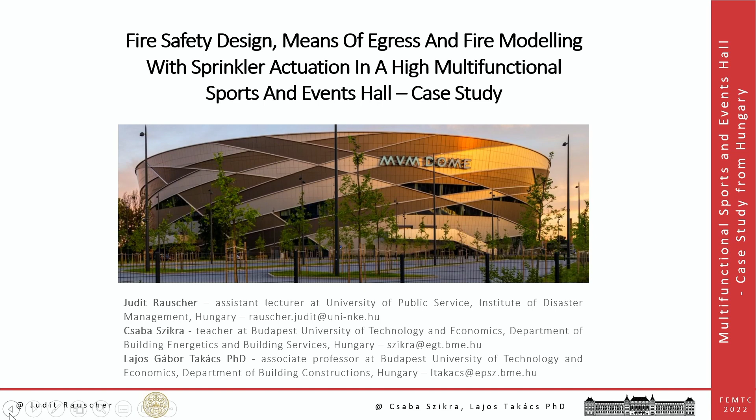Good morning, everyone. First, let me introduce ourselves. Judit Rauscher, she was responsible at this case study or design work for evacuation simulations. My colleague Csaba Szikra, who was responsible for fire modeling, and I'm Lajos Takács. I was involved in both traditional fire safety design and fire simulations.

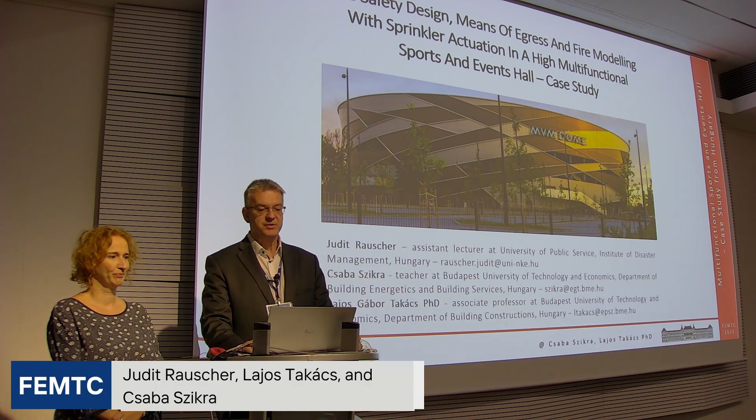So, we'll introduce this arena or sport event hall called MVM Dome, which was finished in 2021 in Budapest for the 2021-22 Handball European Championship. This is a multifunctional building, and the design was started in 2019.

As I mentioned before, the building was finished by December 2021, which was a pretty short time for design and build construction. The building has 5 floors, and the highest floor level is 23 meters above the ground. The most important data: 20,000 people is the capacity of the spectators area, while at certain events even 24,000 guests can be in the building.

This is one of the largest indoor areas now in Europe. The total floor area is more than 50,000 square meters. It is divided into 17 fire compartments. There is a fire detection system, sprinkler system, and public address system. All the staircases are pressurized, and there is a smoke and heat ventilation system in both the arena and the concourse areas.

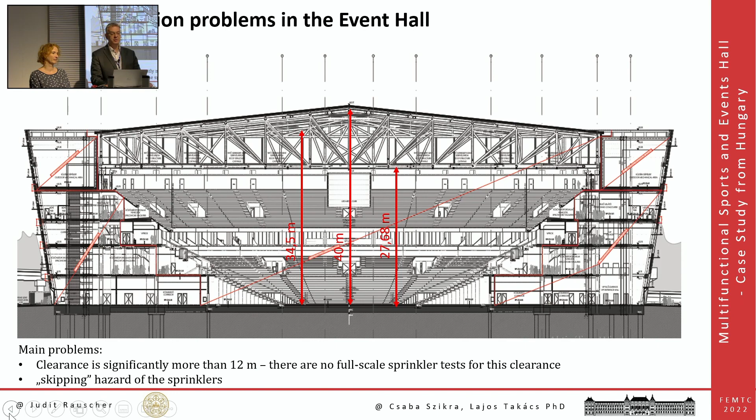So our first problem was what to do with the extreme dimensions of the building, mainly the headroom or clearance, which at the highest point is exactly 40 meters, and such a large building must be protected with a sprinkler system in Hungary.

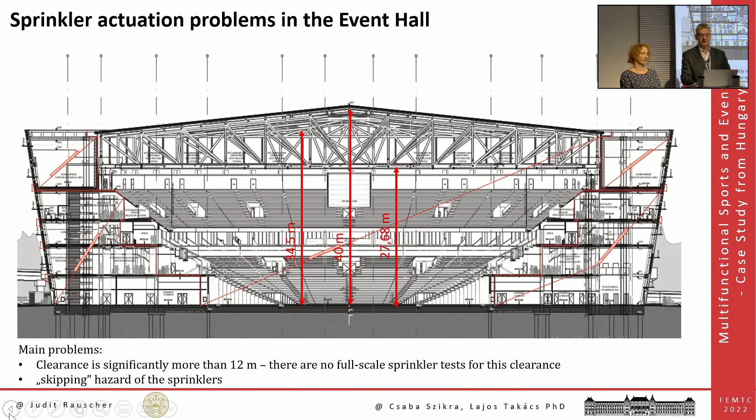Obviously, activation of the sprinkler and the so-called skipping hazard is a challenge. Interestingly, the European sprinkler standard says only one sentence about buildings exceeding 12 meters: authorities shall be consulted at these buildings. Okay, we have consulted with the authorities, they required sprinkler. Then we can finish this presentation, of course, but obviously we checked what kind of sprinklers can be used.

We have a guideline in Hungary about sprinkler systems or fixed firefighting systems, and it recommends quick response type sprinklers at such high clearances, referring to full-scale fire tests.

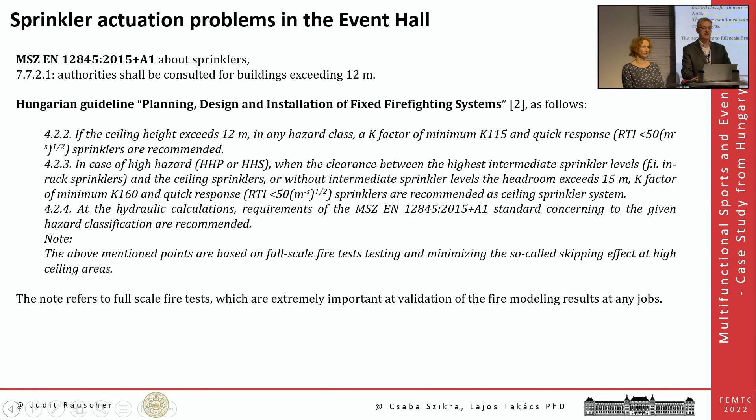You can see here... oh I'm sorry, wrong direction. Finally, our sprinkler designer colleague offered a special quick response extra large orifice sprinkler, according to a publication about large headroom sprinkler tests, full-scale fire tests, with a K factor of 160, an activation temperature of 68 degrees, and an RTI factor as low as 28.

So our goal was to test the large area, how the sprinklers are activated, what kind of fires can happen over there, what are the activation sequences, and whether there are skipping problems or not.

Fire modeling is usually provided with predetermined fire scenarios and fire sources using simple cubes, but we felt in this situation more complex or complicated objects are required for a more realistic fire modeling. Just 2 examples.

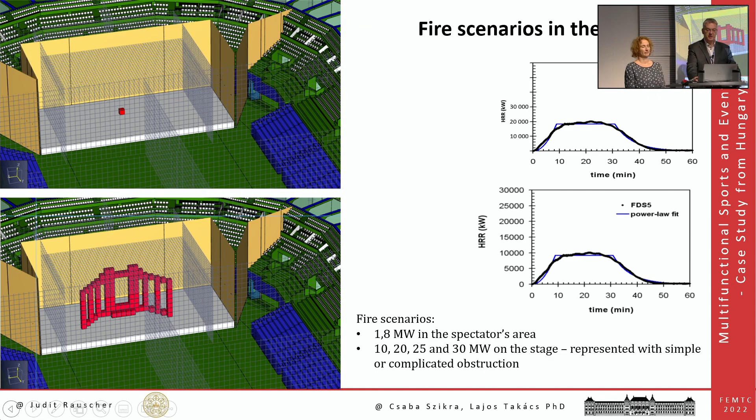So here are our results. The activation times were pretty long, obviously, because of the high clearance. But over a 10 megawatt fire source, at least 1, 2, or even more sprinklers were activated. Obviously, increasing the fire source heat release rate, more and more sprinklers were activated.

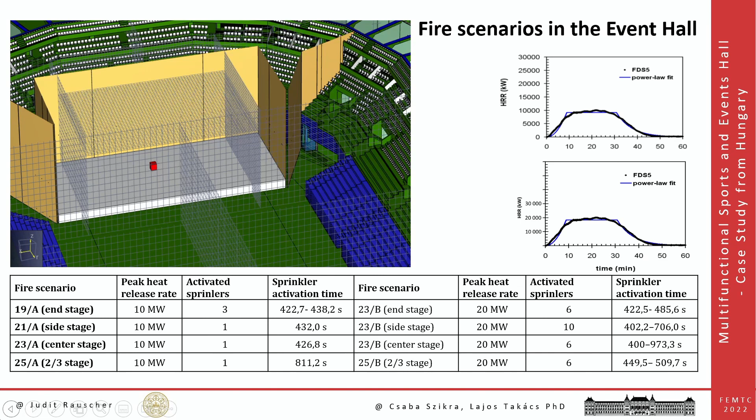And obviously, it was even more interesting with the spreading type of fire, where the activation times were a bit longer. Interestingly, here we had an important conclusion: the smoke and heat ventilation and fresh air supply must be delayed.

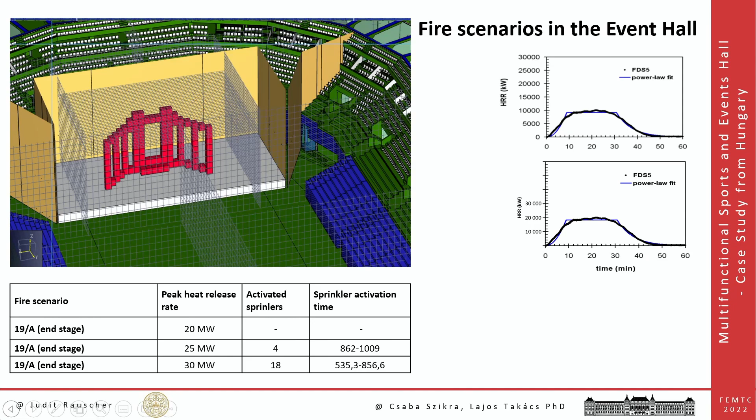The delay is till the last sprinkler activation, in order not to have skipping or to minimize the skipping effect, because otherwise, if the smoke and heat ventilation is activated automatically without delay, the plume was not vertical, and at such a high clearance, the sprinklers were activated in another position. So obviously we still had at the end some sprinkler skipping problem.

Here there is a layout showing all the activated sprinklers at one of our fire scenarios, showing that of course several sprinklers have been activated.

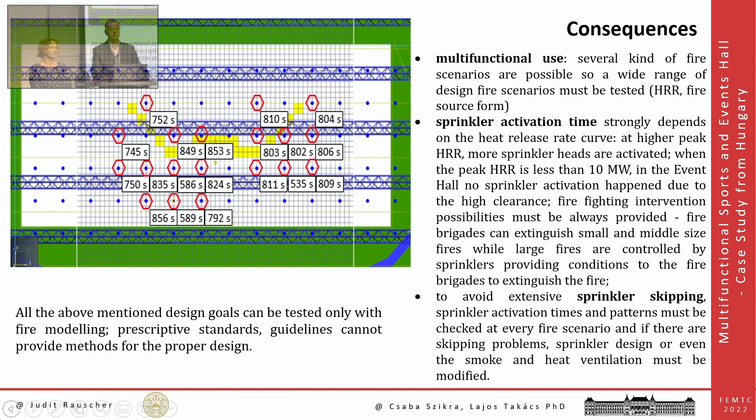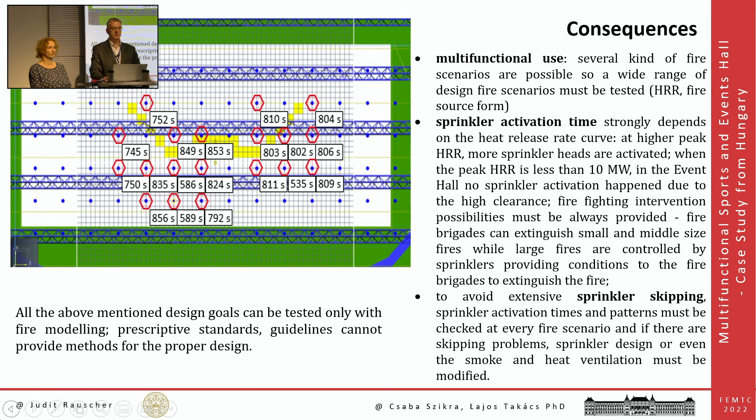So the fire is more or less covered with activated sprinklers, but anyway, a complex approach is needed to provide proper results, because not only the sprinkler activation is important, but if we have a long delay at the activation of smoke and heat ventilation, it means a safety problem for the evacuation time, which will be shown by Judit.

Anyway, we have two tasks. First, to provide proper conditions for evacuation. Second, to provide proper conditions for firefighting intervention.

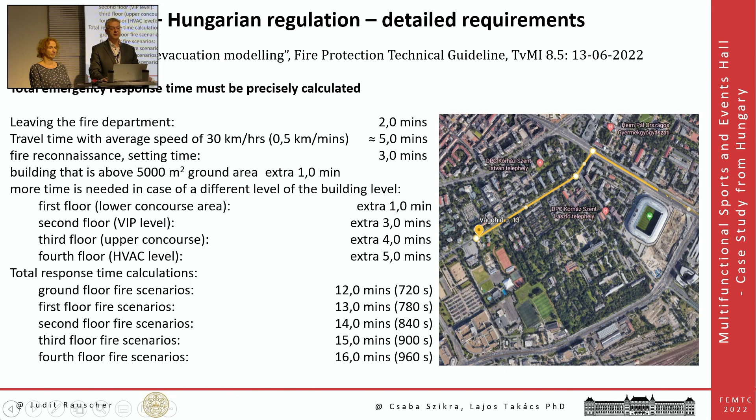And for the second task, we have to calculate precisely the total emergency response time of the first fire brigade, according to our fire modeling guideline, which is shown here.

According to the Hungarian guideline, the visibility can be less than 5 meters only within a 25-meter radius circle around the fire source, which was fulfilled by the controls and the building, even without this type of long delay, because of the enormous hall or room or area.

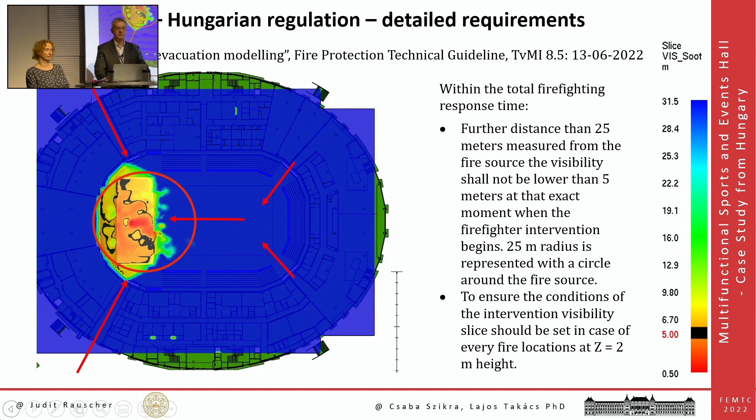So this was the story of the event hall.

And the other challenging task was to provide proper conditions for evacuation at the concourse areas. Here the ground floor is shown. Only one part of the ground floor was part of the concourse area, but here you can see the first concourse level where we provided not a simple smoke and heat ventilation, but a smoke control system.

We divided the concourse area into 6 or 8 zones, depending on the level, and there were multiple reversible smoke and heat ventilation and mechanical air supply points, and they were controlled according to the position where the fire broke out.

So in the affected virtual zone—because there were no real draft curtains or smoke barriers—at the affected fire zone or smoke zone or virtual compartment, the smoke and heat ventilation was activated, and in the neighboring zones, air supply was activated.

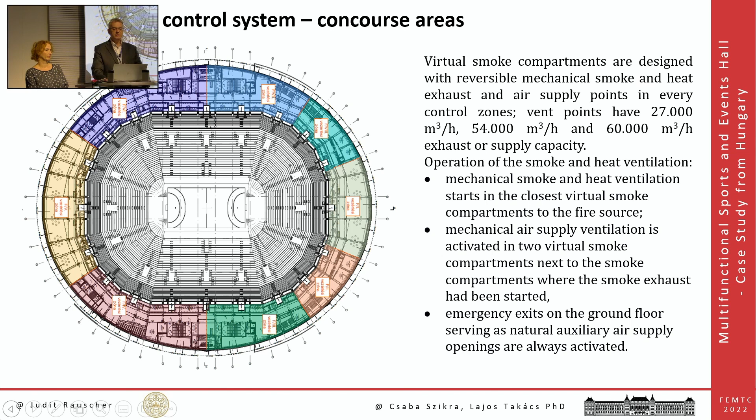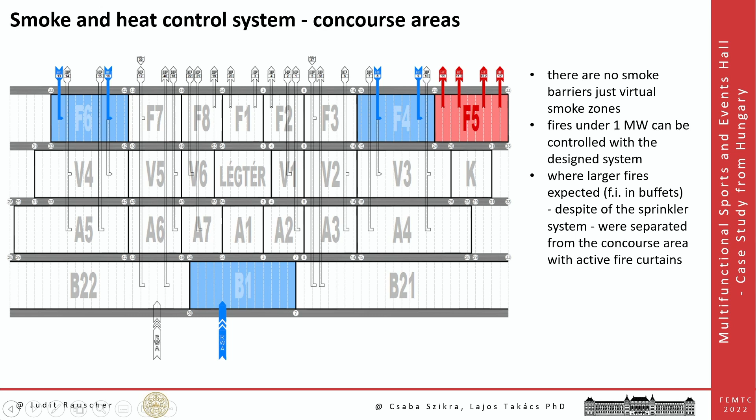You can see here we used different points, and just one of the control schemes showing the affected zone with red, and the heat and smoke ventilation and air supply zones, the neighboring zones, with blue color. So finally, we were able to provide proper conditions for the evacuation.

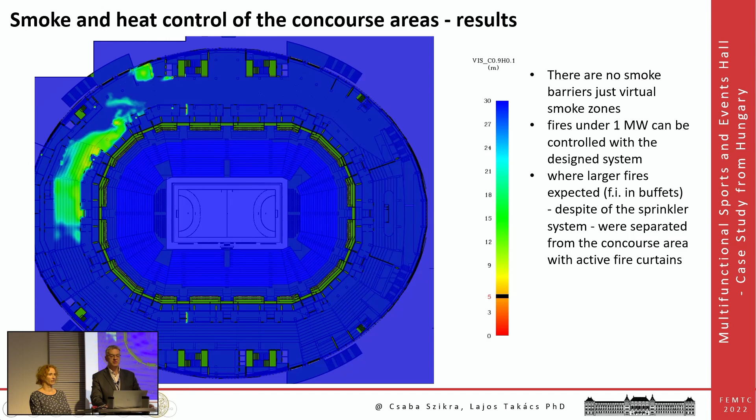You can see here one of our results showing that the smoke spread is quite limited, but a very important consequence was that it is working only with small or medium scale fires. So fires over 1 megawatt power output or heat release rate would be too much.

So there were two additional requirements. Only a small amount of combustible materials can be placed in the concourse area, and obviously there are large special places where the amount of combustible materials is more, like the buffet. Buffets were separated with automatic active-type fire curtains from the concourse area in case of fire, and with this type of solution the conditions were acceptable.

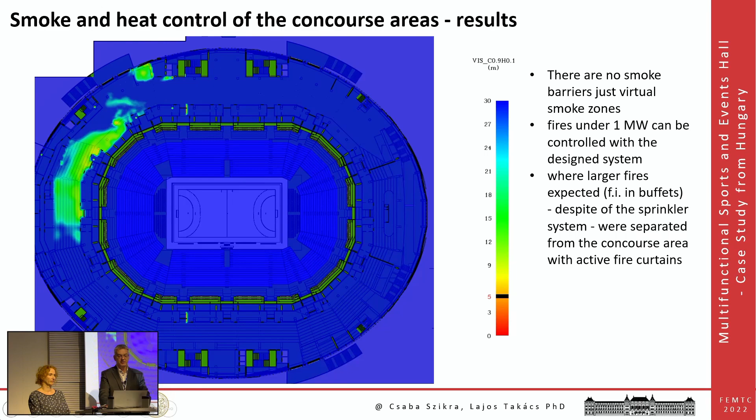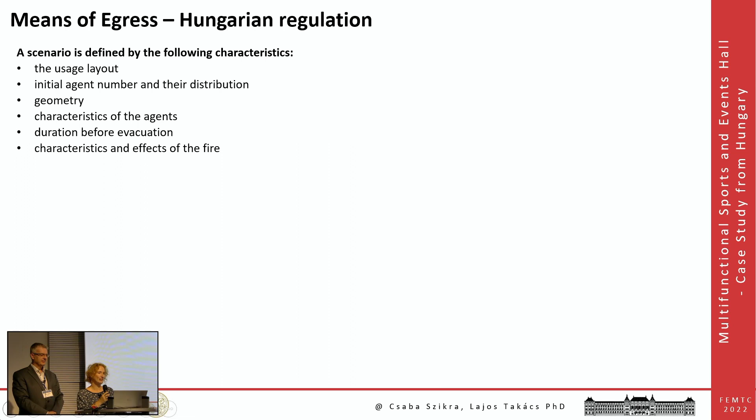It's okay. Hello, then let's speak a bit about evacuation. First of all, I would like to say some words about Hungarian regulation. As you know, a scenario is defined by the following characteristics, for example the layout, the agents, numbers and characteristics, and so on.

But Hungarian legislation says for a design process we only have to check the worst case scenario. But we believe that it is not enough for such a building, so we try to check more and more layouts and scenarios in this case.

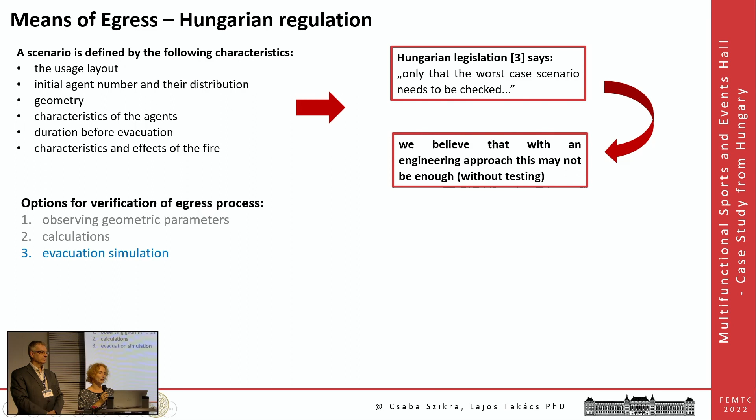Due to Hungarian legislation, there are 3 options to verify the egress process: by observing geometric parameters, by calculation, or by evacuation simulations. Due to the codes, for this special building there would be a 90 second period for the first part of the movement, to reach the fire-safe route, which due to the size of the building was not good for us. It's too small a time. And in the code we can use pre-movement time of 0, and for calculation, this speed.

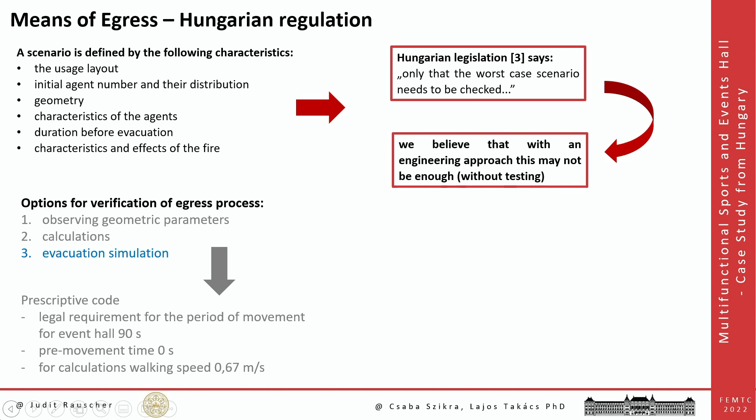We decided not to plan or design this building with the prescriptive code. Then we checked with evacuation simulations. So we determined the ASET time by FDS simulation and the RSET time by Pathfinder.

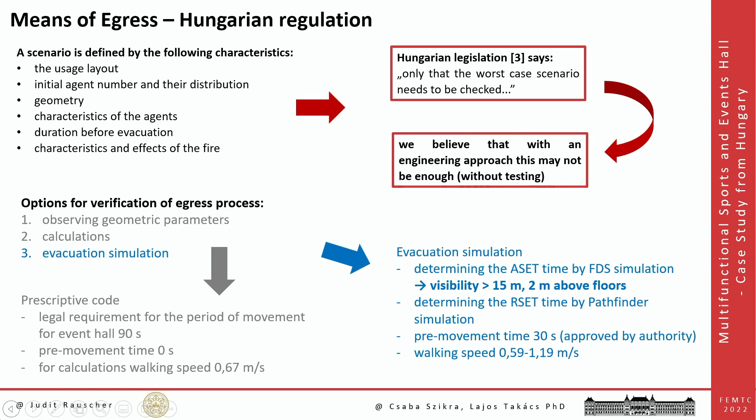Here are some pictures about the building. There are 4 external escape stairs from the first concourse level, which they can use. And from the upper side of the building, they can use 6 staircases. And there is one more route, the main stairs in the main lobby, which is an open area in the concourse areas.

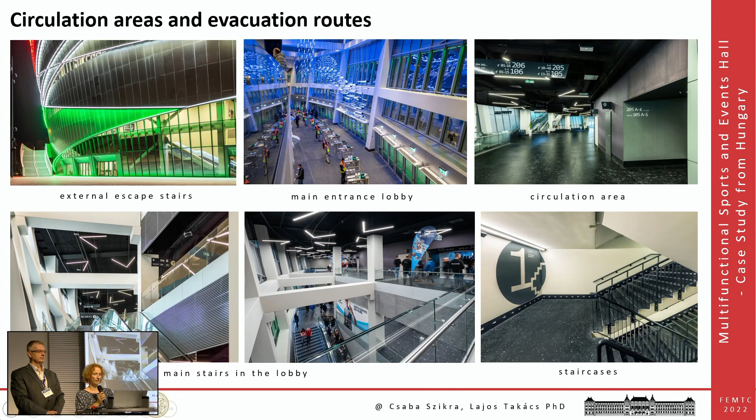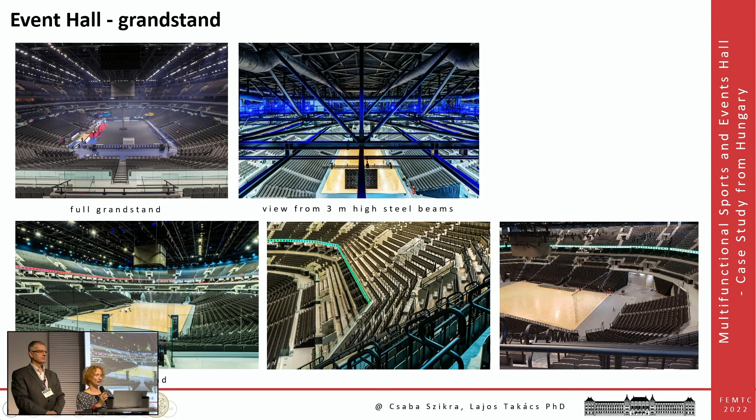The investors' aim was to build a multifunctional building for any kind of events. The architects made special solutions for that, dividing the grandstand into three areas. The lower grandstand is made usually with mobile stands that can be pushed in 3, 8, or 11 rows so they can change the arena. The VIP sectors and the upper grandstand are fixed with fixed seatings.

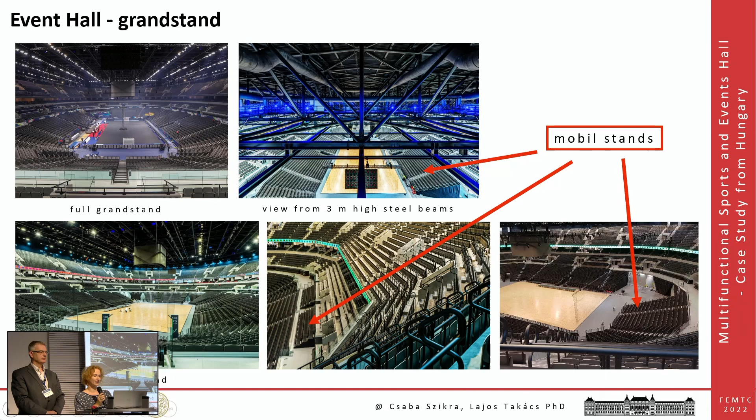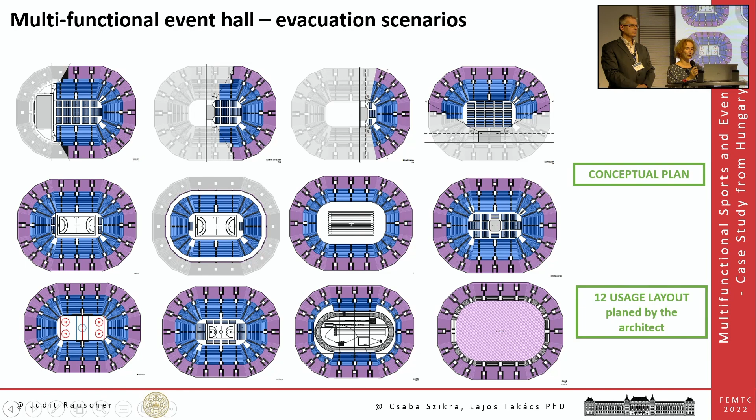At the conceptual plan, the architects drew up about 12 layouts. We decided to plan simultaneous and complete evacuation of the building because we found it would be the best solution, and the areas have to be planned for this number of spectators. At the permit plan, we had to choose only one layout because of our short time, which was the basic we used. This was the handball layout.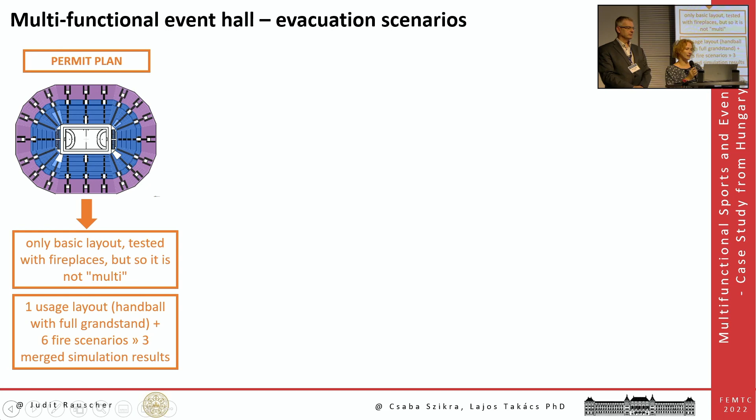And we made only for this the evacuation simulation, and we checked it with 6 fire scenarios. From these 6 scenarios, we merged the results into only 3.

At the construction plan, many other types of layouts came into the architects' mind. You can see the sports ranging from handball to ice hockey, curling, and even a swimming pool. That's a very wide range. For events, the stage can be placed in more places and have a side stage. There are other events like monster truck shows, so it's a really multifunctional plan.

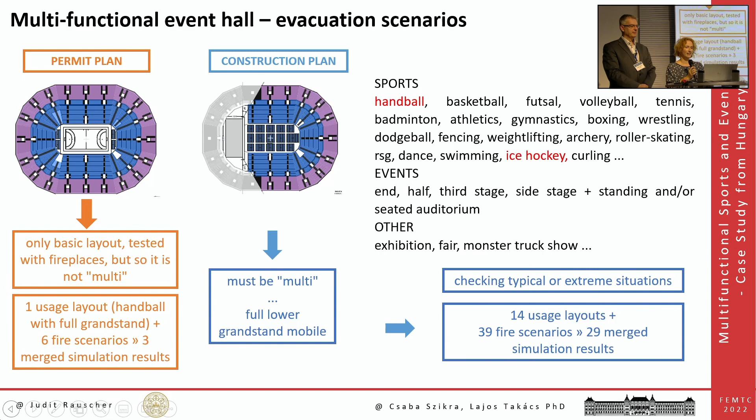We tried to make groups from all these layouts which have similar features for the egress process. So we created 14 layouts, and we checked them as typicals or extremes, with 39 fire scenarios.

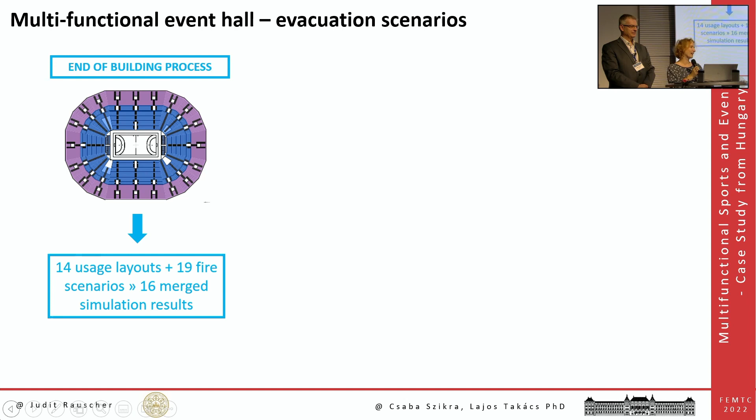At the end of the building process, we had to check it again because some modifications were made during construction. So we rechecked that. After that point, the building operation manager came into the design process at the end and said there would be many more layouts in this building to have checked, but this project had ended, unfortunately, so we didn't make these additional layouts yet.

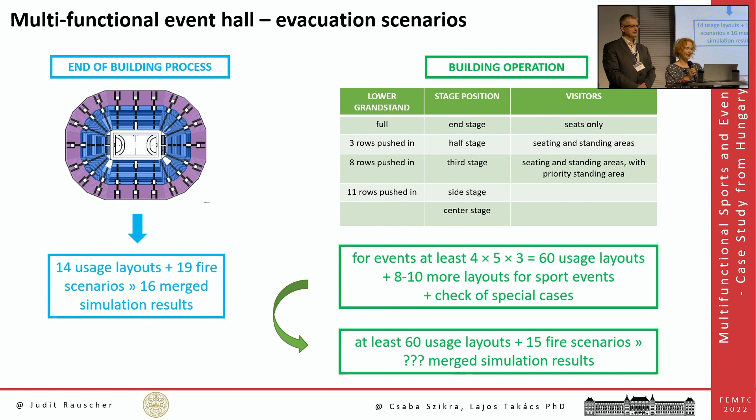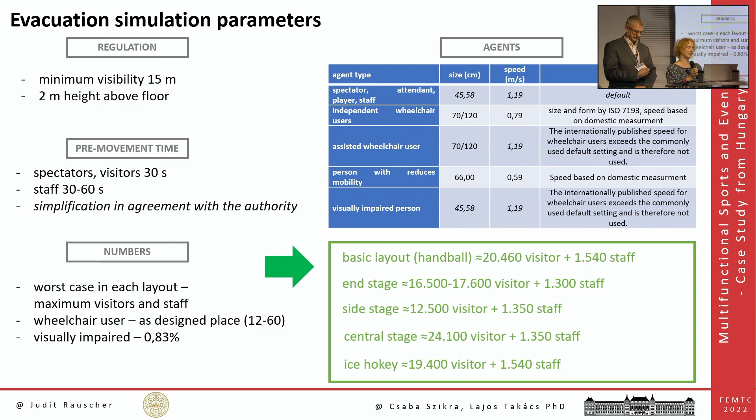Here are the parameters for the evacuation simulation. You can see the agents and the pre-movement times are fixed numbers. We know this is a simplification, but this was the agreement with the authority. We used the maximum visitor and staff numbers, including wheelchair users and visually impaired people also. For the merged simulation results, we checked only the minimum visibility of 15 meters above 2 meters high from the floor.

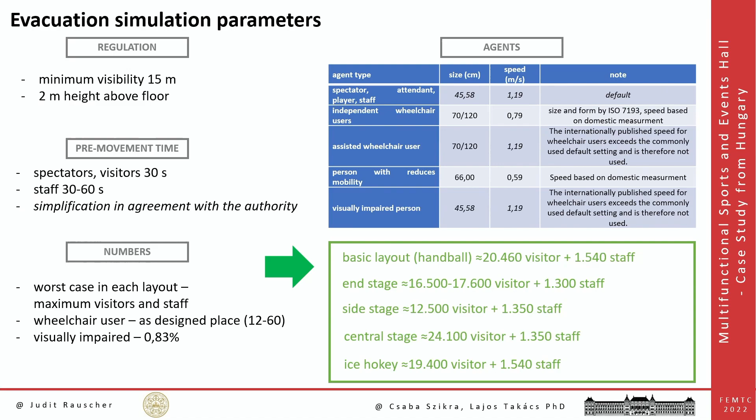In the green area, you can see the typical layouts and the numbers we can check, and we can prove it would work in this building. And now some videos.

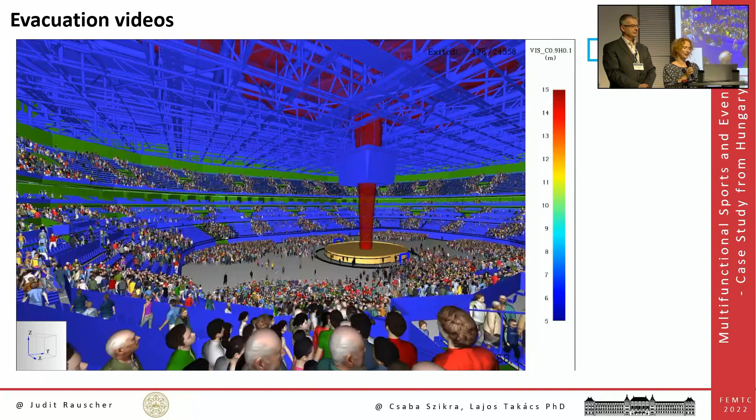You can see the central stage layout, and 11 rows from the grandstand are pushed in, so it's a bigger place for the standing area. And the fire results show the surface of 15-meter visibility.

We tried to check our results and show the client and the authority how it would look with the building structures and then without the building structures. So it's nice work.

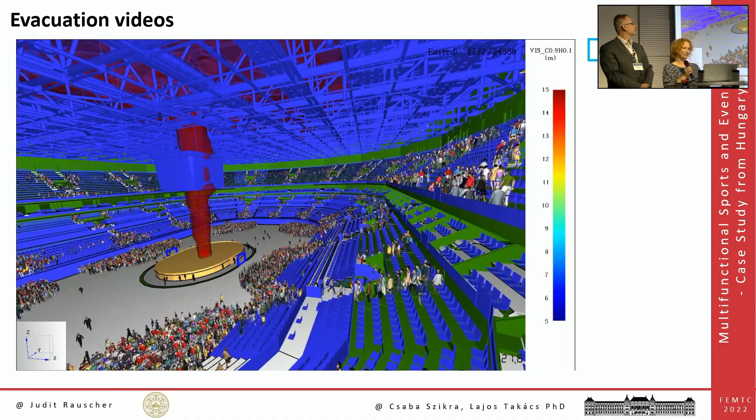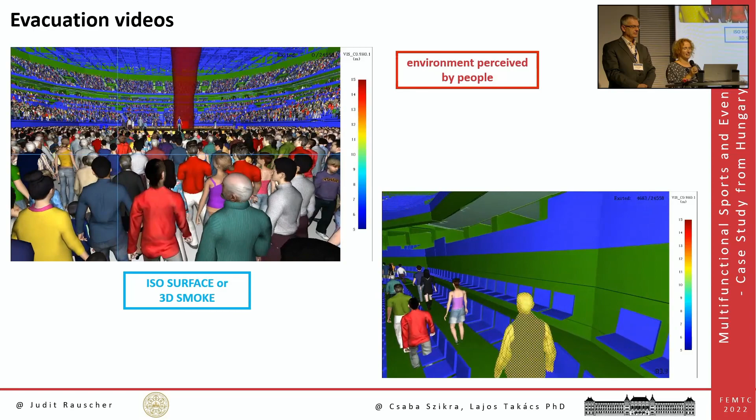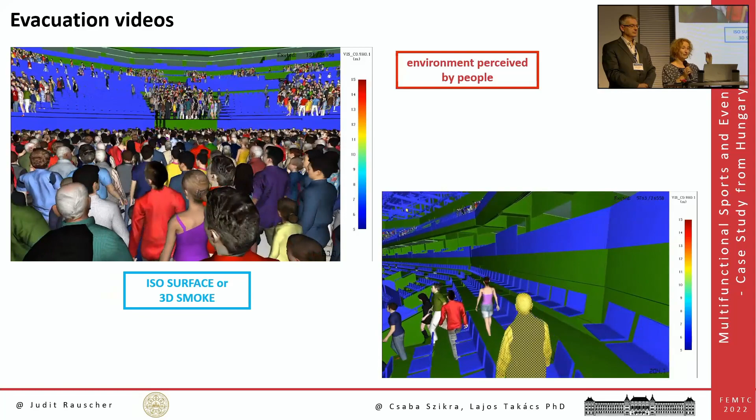There are 2 more videos from other perspectives. I think it was very useful for the client and for the authority, and for us also, that people during the crowd would not notice almost anything about the smoke up on the ceiling. So it's good news for me, I think so.

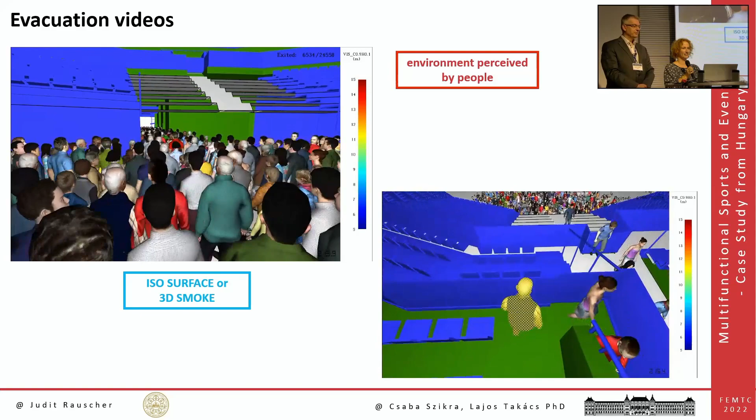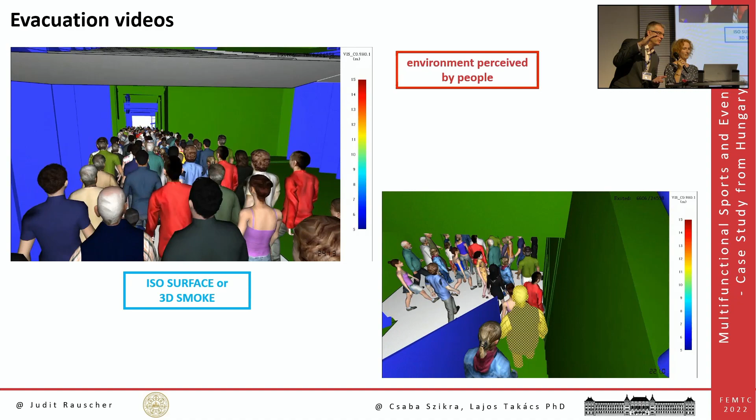The height of the steel girders is more than 5 meters. The bottom level of the mother grid is 27 meters and the top is 40. So it disappears.

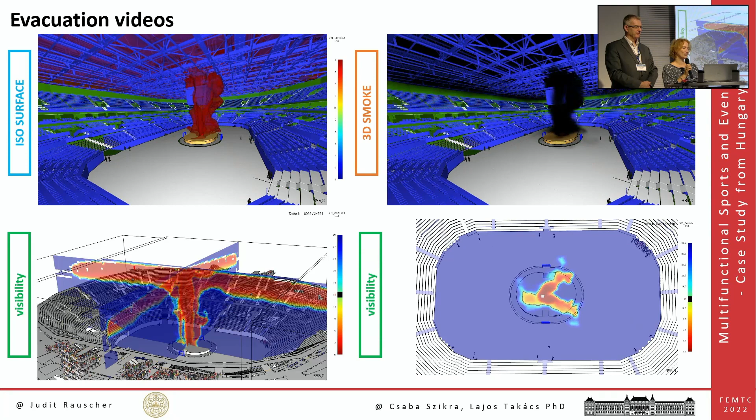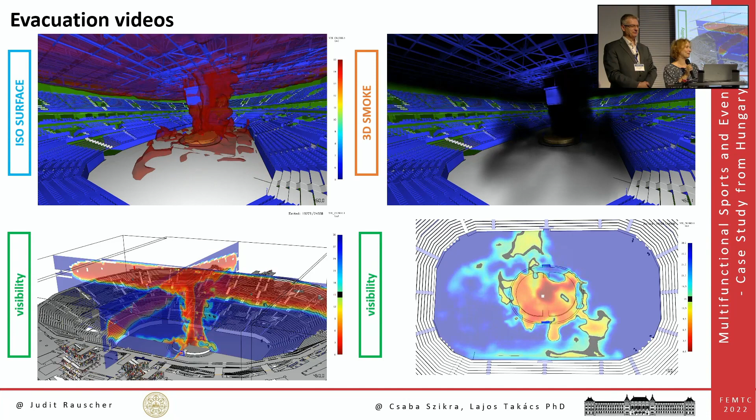There are 4 videos parallel. It's the same scenario, the central stage, but after time. I would like to show you and the authority how sprinkler activation affects the smoke and the environment for egress. After that, it was our goal to reach the evacuation ended before the sprinkler activated, because it's terrible, I think so.

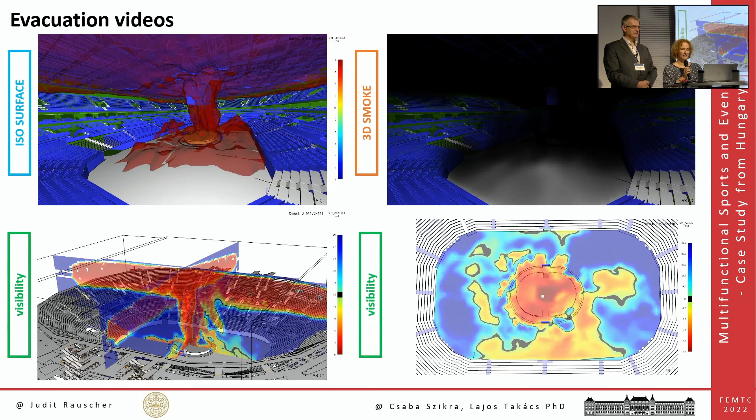And it was about, for this layout, about 400 seconds. So it's a huge amount of time compared to 90 seconds.

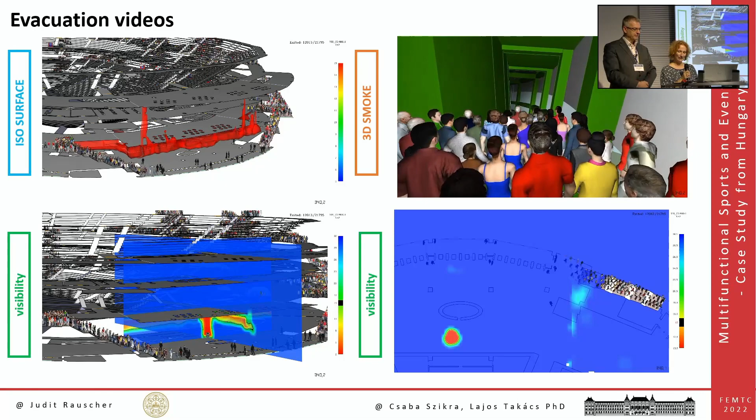Our experience has shown that the building areas operate completely differently in the event of fire. So we checked many places on the concourse area. These videos show a fire scenario made in the main lobby on the ground floor with a garbage litter, so a small fire.

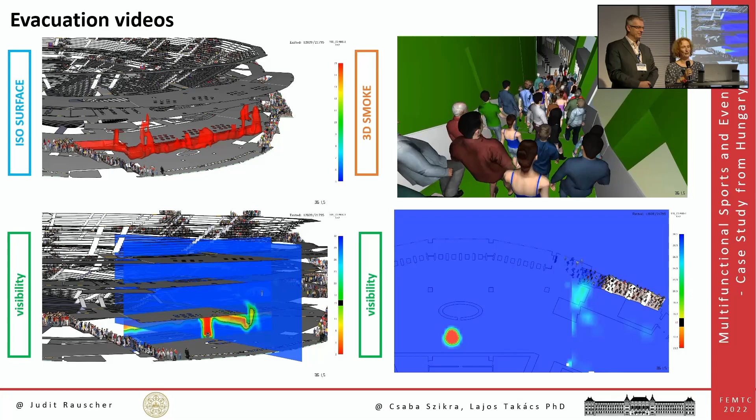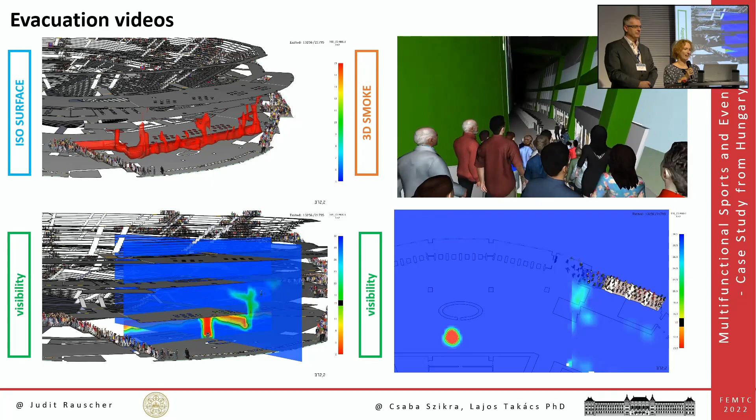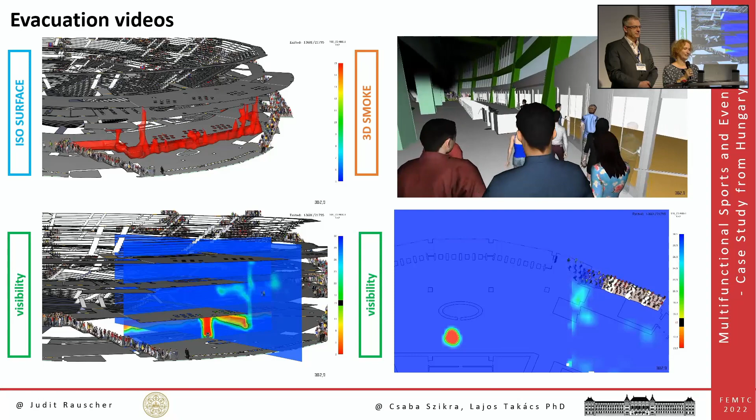You can see the people have to go through this main lobby on the main stair, but they are not affected by the fire or the smoke or other things. So we found it is relatively safe for them.

Based on our experience, there are more ways to determine ASET time using FDS. In simpler cases, we use only test slices to determine the time, but like in this building, in a complex geometry, we think the better way is to merge simulation results.

If we think so, then why don't we always do this way? Because it has disadvantages also.

The time factor is very difficult to predict, how long this work takes, and it is not linear, because, as in other planning phases, we don't know how many mistakes are in the building and in the simulations, and how many reruns we need during this work. So it involves very long hours and many reruns.

Because of these parameters, it's an expensive design phase for the investors, so usually they don't want to pay for it. But we think it's the most real solution or design tool in fire safety, only if the models are done right and professionally well.

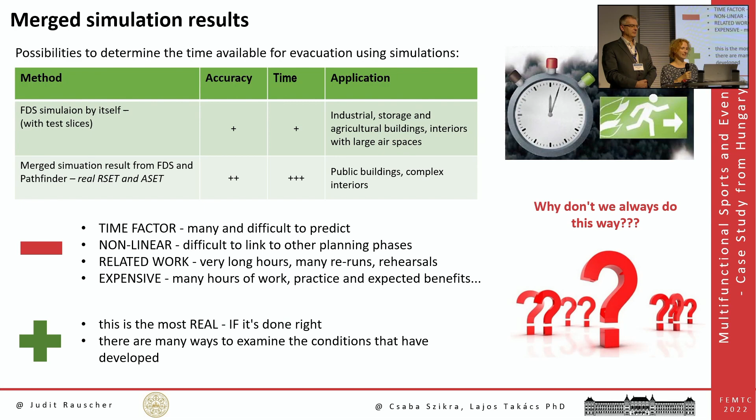From this real case, our conclusion was that it was very useful for us to participate in the whole design process and to work through the whole process with simulations.

Obviously, to avoid extensive sprinkler skipping, sprinkler activation times and patterns must be checked. As a conclusion, long sprinkler activation times in large, overcrowded halls are not bad, but obviously they have to cover the fire or control the fire.

I agree with Judit's conclusion. These merged fire and evacuation simulations are the best, but they require the longest time, which is why it was not possible to finish within the building permit procedure.

We had to extend this activity into the construction work phase, and in the design and build construction, it was a real challenge. So thank you very much for your attention, and I wonder if there are questions. We are free.

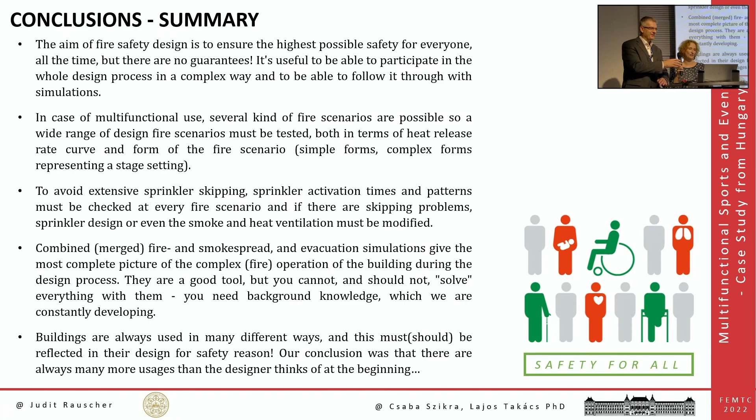I would like to say one more word. Our conclusion was that there are always more usage layouts than the designer thinks at the beginning. So that was our work. Thanks for your attention.

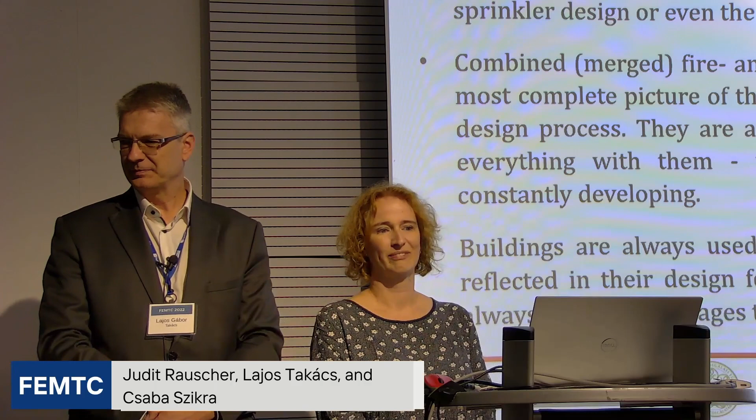Okay, so we have a couple of questions in the chat already, and some from the room. The first was, how do you estimate the size of the fire that can be expected in the handball area, and additionally, what growth rate do you expect?

As I tried to mention, we have numerous fire scenarios starting from 1.8 megawatts up to 30 megawatts, so it is hard to estimate. That's the reason why we have to check the behavior of the building with totally different fire heat release rates, and even the form of the fire source can be totally different. That's why we have had multiple scenarios.

The activation time seems to be long. Would you replace them with fast response heads or sensors for the activation of the sprinklers? They were fast response type sprinklers, with an RTI of 28, which is quite low.

Let's see, I was looking for Eric. Are you here? Did that answer the question, or do you have more? Yeah, no, the delay is maybe beneficial.

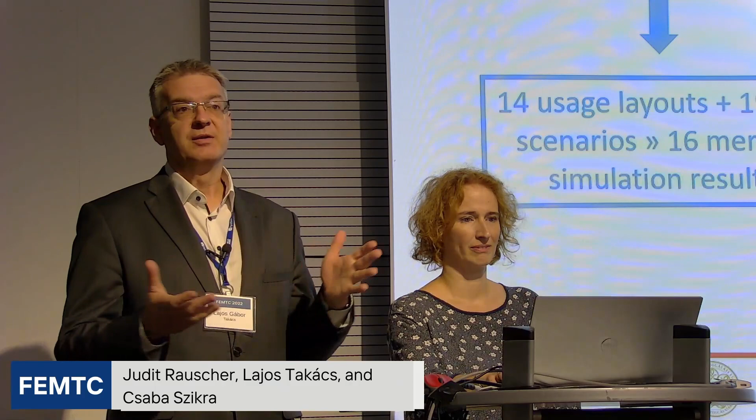With the huge volume, why do you need a mechanical air supply, and positioning it close to the fire area, could it maybe augment the turbulence? So why don't you supply air farther from the fire? Because, as maybe the image shows, there are not too many transparent surfaces, most of the building is covered with solid panels, and it's simplified, so we had to follow the architectural design.

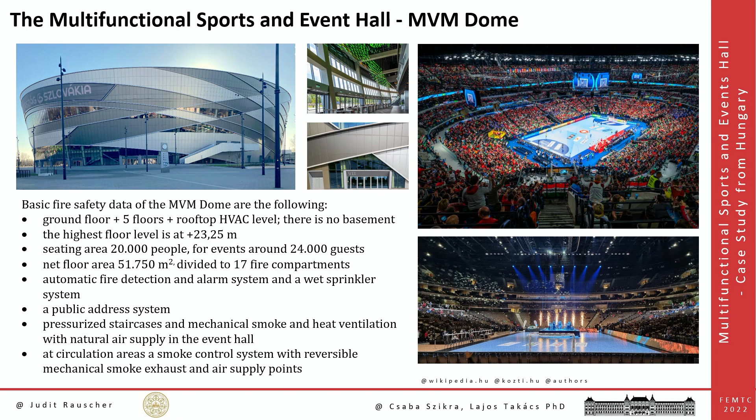I assume the question regarded the concourse area, which has direct contact with the outdoor area, but maybe our first slide shows this properly, this one. Yes, there is not so much place for windows because of the design of the building and because of the price. It was cheaper. Yes, there is a simple answer.

But anyway, using smoke control systems, obviously validating with simulations, can show the efficiency. Our first results were not satisfactory, so we had to work a lot to test how to control these multiple points, for sure. We haven't explained the whole process, because then we would stay here till night, but anyway.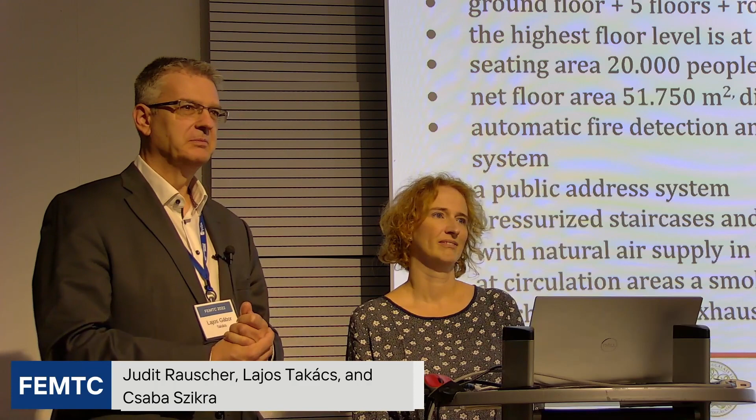Great, and then a comment that it was very interesting. During commissioning, did you use any hot smoke tests to check the performance of the smoke management system in the concourse spaces? And was the system designed to operate with multiple zones activating at the same time?

No, real smoke test was not carried out. It was a decision by the constructor and the authorities.

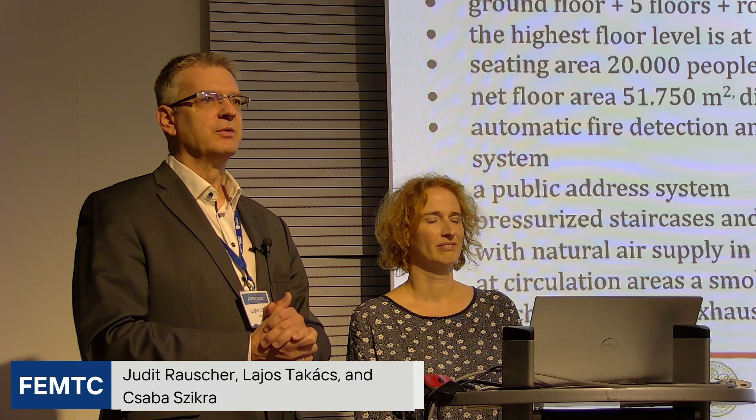And then, was the system designed to operate with multiple zones activating at the same time? With multiple zones, can they activate simultaneously? No, they were controlled according to the fire position, so only the exhaust was operated at the affected zone, and at the neighboring zone, the air supply was provided, to keep the smoke in as small a space as possible. Okay, thank you.

Did you take into account the extinguishing effect of the sprinklers, or was the fire free to develop to its peak heat release rate, which remained constant until the end of the test?

It's interesting with fires of about 30 megawatts, how that performed. So 30 megawatt was 30 megawatts. In these scenarios we haven't taken into consideration the extinguishing effect, but there is some possibility to take into consideration the cooling effect of the sprinkler now in Hungary - not to extinguish the fire, but to control it. This technology wasn't used here because it was only released this year in our guideline.

Do you agree with the used pre-movement time equal to 0? Do you think that assumption is representative of human behavior in fire?

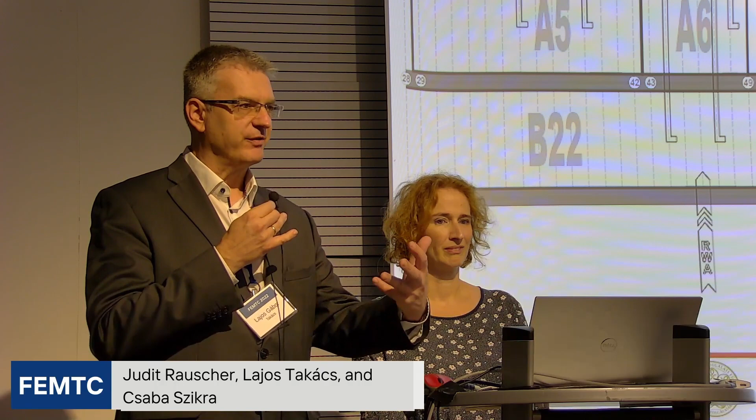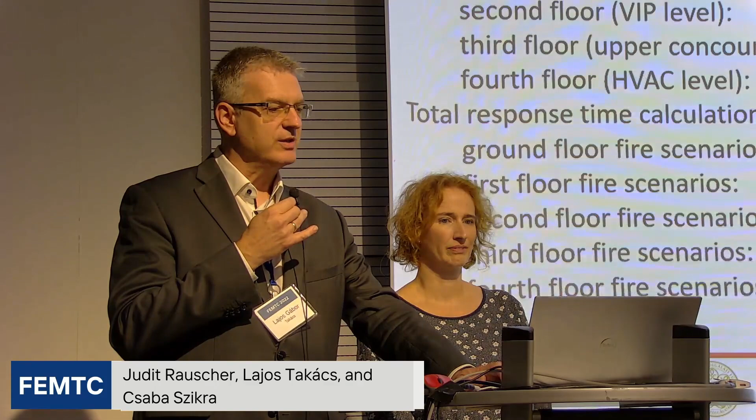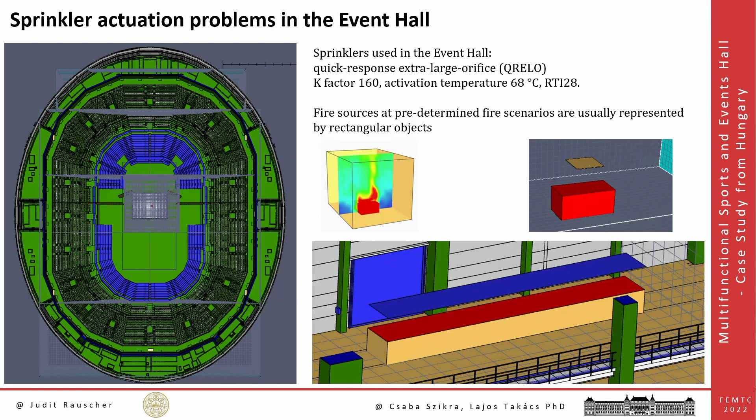Second, you are right, we are not sure how the sprinklers will behave in a real fire. That's why we selected a lot of fire types, and we worked together with the sprinkler designer. This type of sprinkler, this orifice or QRELO sprinkler, was selected according to publications based on full-scale fire tests with large headroom, but unfortunately not 40 meters - there is no 40 meter clearance sprinkler test yet. But the authority required the sprinkler, so the best thing we could do is check all the publications and test as many fire scenarios as possible.

I was wondering why you used a threshold of 15 meters for the visibility. Because according to the Hungarian guideline, it is required.

It is 15. I saw in a lot of presentations that in other countries it's 10, but in Hungary it's 15. Hungary is always different.

With this question in mind, did you check the visibility for self-illuminated signs or reflecting signs? For reflecting, yes, you are right - only for reflecting, because otherwise 2 simulation runs must be provided for internally illuminated and reflecting, and reflecting is simpler.

Thank you, yeah right, beautiful presentation. Thank you.

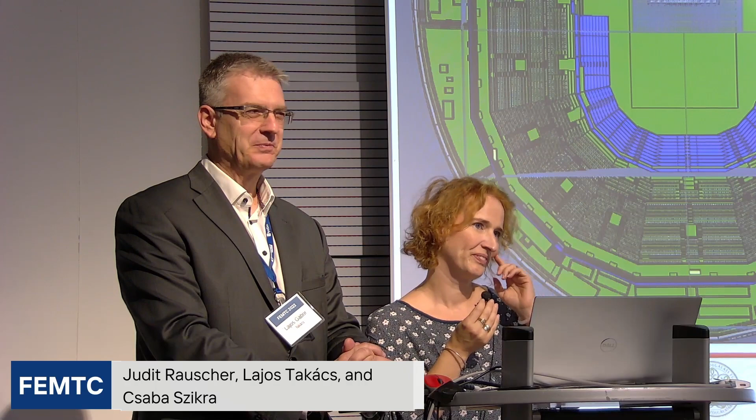My question is how do you decide the initial position of some people, like for example wheelchair users, whose position will influence the evacuation a lot. For example, if they are close to the exit they can evacuate quickly, meaning little influence on the whole crowd, but if they are far from the exit they will reduce the crowd speed during the whole process.

Yes, I know. With the architects we discussed dedicated places for wheelchair users on the lower grandstand concourse level, placed as near as possible to the external stairs, and at the top of the external stairs there is a bigger place for them to wait for the fire brigade to help them. There are also 2 more evacuation lifts, elevators in the building, for use from the upper VIP level - the upper grandstand they can't use because there's no place for them to see the event. So they have dedicated places in the building.

Thank you. Anyone else? No? Okay, thank you so much for your presentation. Thank you.